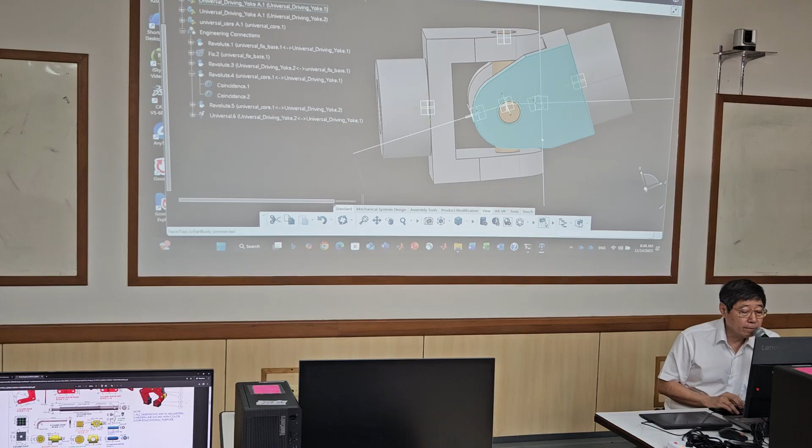Rotation, it's a pivot point right, normally let's say we have this one and this one at the same angle. This one and this one have to be the same angle, let's say this omega, this also omega, same, because universal joint does not do any speed reduction, they just allow for different angles.

We're going to use the universal joint. Normally to manufacture universal joint, if you want to buy this one they have some spec, sometimes they specify the limit of the angle. For example, let's say 30 degrees. It means they build this one provided that the angle between two shafts is not more than 30 degrees, because if they don't do this there could be a crash. So they have to limit these, so when you buy this one you normally have to check the limit angle as well.

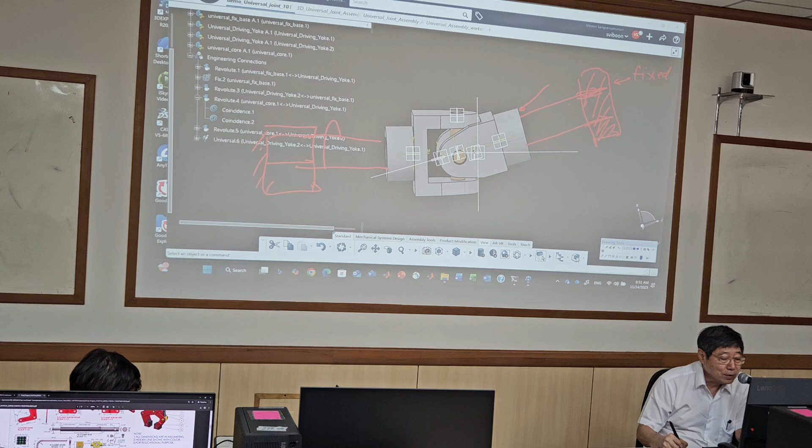You can just draw two lines, this one as a part, and make it as a fix. Or if you don't want to do this, maybe you have to draw a shaft here that fits to this yoke, and have rotation here with this one fixed. You can do this too, but it's more work and takes more time, so we just do it this simpler way.

Just draw this one and this one as a fix. So this one is fixed, this one, look at this, we have universal fixed base.

I open this one, look at this, it's just a line, see, just a line. And this is a rotation point, this is actually a rotation point. The length of this line can be anything, no problem.

And this corner is a rotation point, right, rotation point, you have to draw this one, in that case okay. So if I draw another one, I should use the driving yoke, universal.

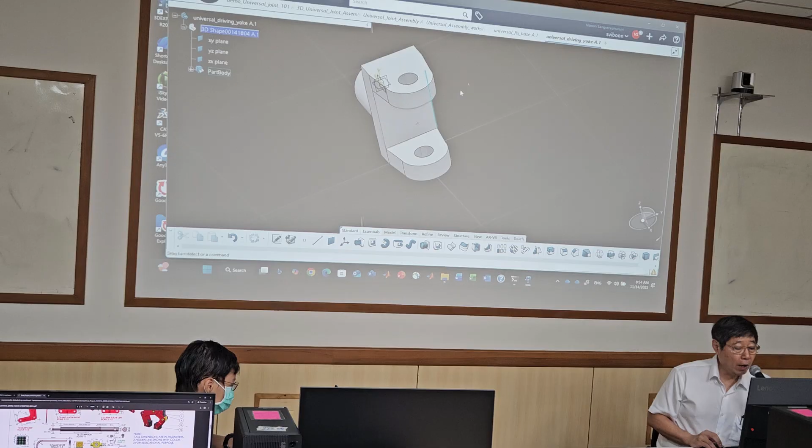Look at this one, got this one. You see, I draw this one, I also add a point, look at this, add point here. This one has to be that corner, right?

This one had to be that corner, right, that corner, same, right. So this is the center line here. So this is a point, you have to add a point there as well.

You have to add a point to make things easier. You see this one, you see that point there. Look at this one, so we have this one as a point, and the link as well, this link will intersect that.

Call it universal core, this one just called the internal. This one should be the intersection point, right, the intersection point between this one, this line, as center, right, this one. So this one has no offset.

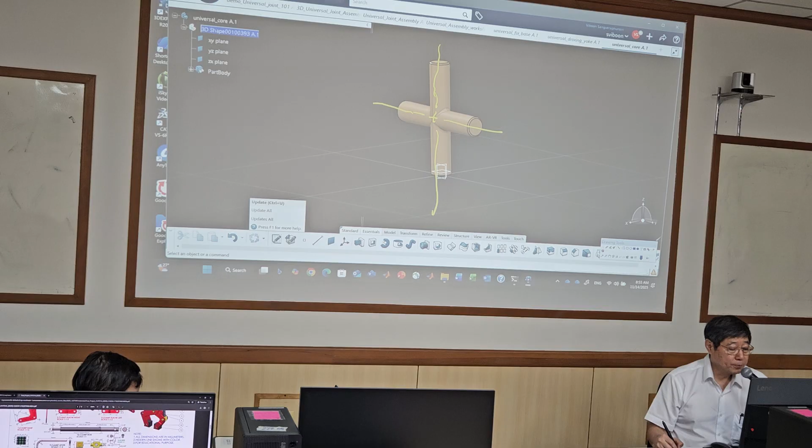The one in the example has some offset, right, in that case you have some offset, let's see this one, right, this one has some offset, but this one has no offset. The one without offset should be better in terms of allowing a higher angle, 30 degrees for example.

So you have this one, you assemble it, right, you see you have to fix this, and this one I will rotate. I actually made a mistake setting it up but overall no problem. This one will rotate according to this one, and this one will rotate according to this one.

And the center point, you see, these two cores come from the same part, right? They intersect at the center point. Use assembly, that's all.

Constraint. Let's see, look at this one. You have to have fix. I fix this one, right? This one. Okay, so this is our frame, actually.

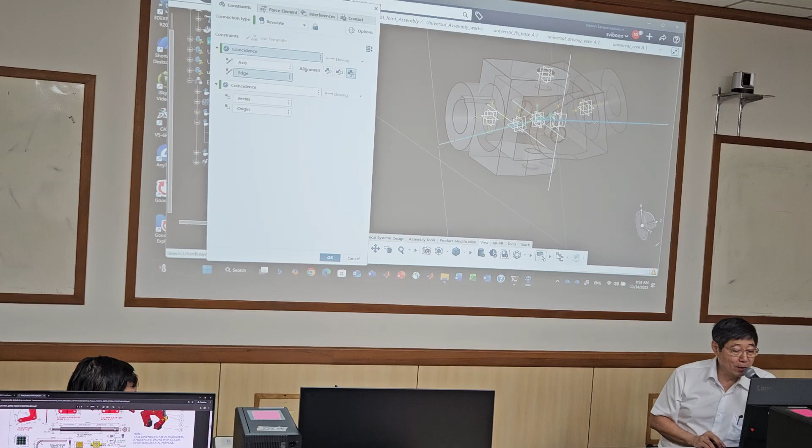Right, so that revolute - this one, this angle, the hole here coincident with this edge, and we can use point instead. The point that I just showed you, with the corner, will be the same.

Okay, that one revolute, right? The other one is this one. This one is between this link and this. It depends on this one.

I mean, this one - look at this one, this yoke one, right? You see, this one will be between core and yoke, this and core.

Okay, can be rotated. I want this one to be rotated, right? This one can be rotated according to this core. So I can set this one. Okay, I can set this one.

So this one is like, no need for constraint. The other one rotation, the same. This one between this core.

Look at this one - between this core, this one, sorry. This core, between this one, because you rotate this way, and yoke will be this one. See, similar to the previous one - when we rotate this one according to this one, it rotates according to this one, okay?

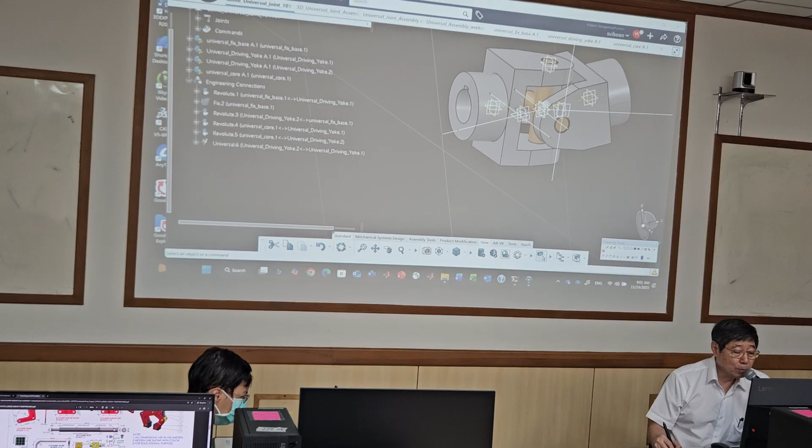Look at this one. You see, you have this one attached to this one, this attached to this, this attached to this, and this one attached to this one, and this side attached to this one, right? Okay, rotate this one. See?

So next you have universal joint. Look at this one, you have universal joint. Look at this, you have many types. I'm choosing - you see, there are many types. Let's say if you look at this one, you look at universal joint here.

If you add universal joint, there are - you see this one or this. We normally choose this one. So this one we have point, line, and angle. Point, line - this is angle. This is a point, rotation point.

So in this case, this point means the point at the corner, right? And this one is one shaft and one angle - angle with respect to the shaft, right? So in that case, look at this one.

Okay, you have this joint, this one. I choose this one, right? So first of all, the point of this yoke and point of this yoke had to be the same, right?

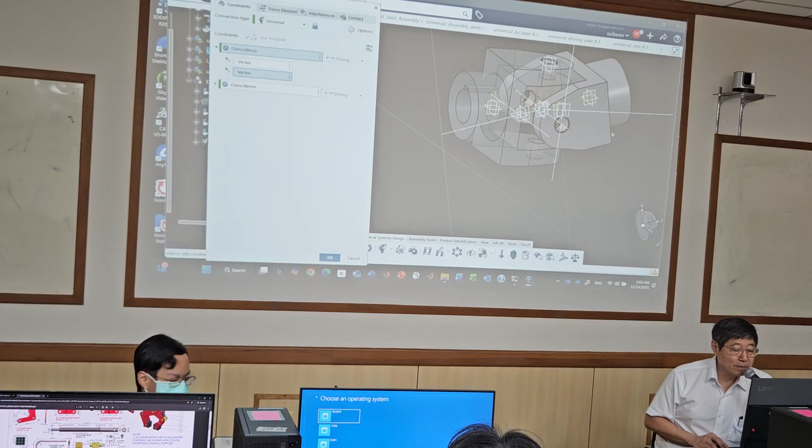This one, right? Okay. Next, that's a point of rotation. Next is the angle - rotate, right? Look at this one.

You can assign this one. You see, you have this plane of this, right? Rotate with respect to this one. You see, rotate with respect to this one. Actually, if you look at this one, this line and plane have to be in the same direction. Look at this one, see, this one.

This is a shaft of this one. This is the plane of this one. See, this plane is for this one. This axis is for the other side - for the other is this one, of this one. See, of this.

Right? So set the universal joint. See that? You see, the alignment is not in line, right? The angle - this one, that's one way. That's one way to be. I think this is probably the suitable one.

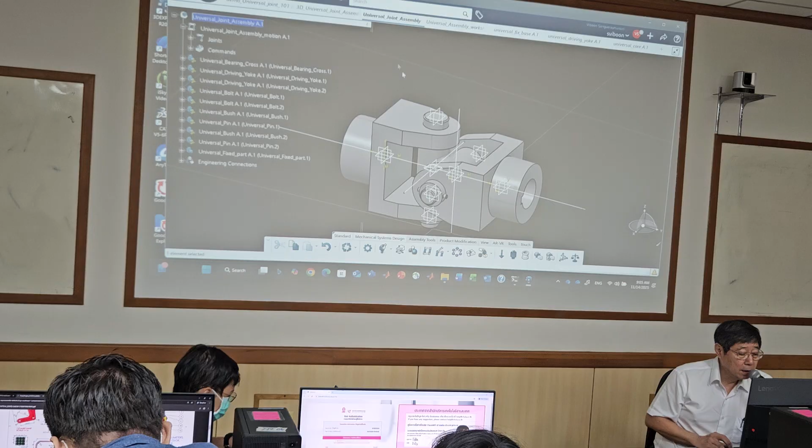If you have this one, look at it. If you have this one, we do have offset, right? You have offset between this one, between this one, and between this one. There's some offset here, offset distance, right?

So you need to find the middle of this one, this is a section point, you need to find this one. In that case, the point has to be not in this line, but in this intersection. The point here. See, it's not on this line. Previously it's on this, right?

But now it's on this because we rotate with respect to this one, with respect to this one. Okay? So look at this one. Say if I draw this one. Let's see, look at it.

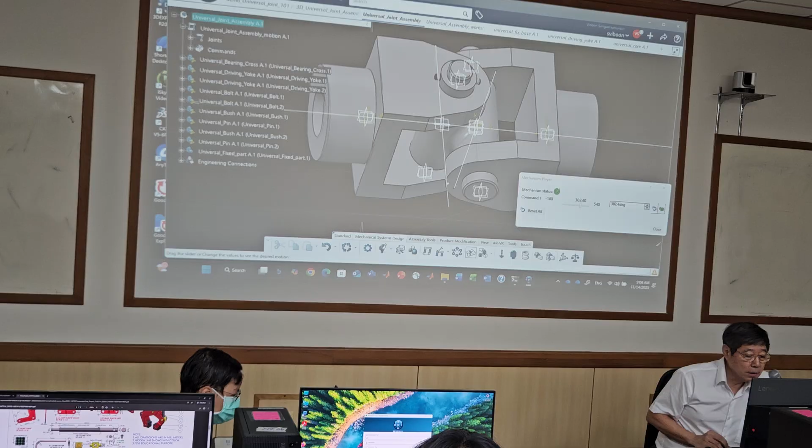You see, because there is no problem in this case, these two axes are aligned. So you don't have this one, right? This is no problem, right? But if I check this one, sorry, this one...

Okay, now we have angle and we have offset, right? Look at this one, you see you have this. Okay, look at this one. Center point, center of rotation in this one, right? This one, this point, right? Look at this one. So you see some of these...

So in that case, you see, you have to be aware. You see this one, okay? So that's the thing that I would like to mention to you. So if you have offset, it's good if the angle of these two is very, very small. Otherwise you have a problem with this one.

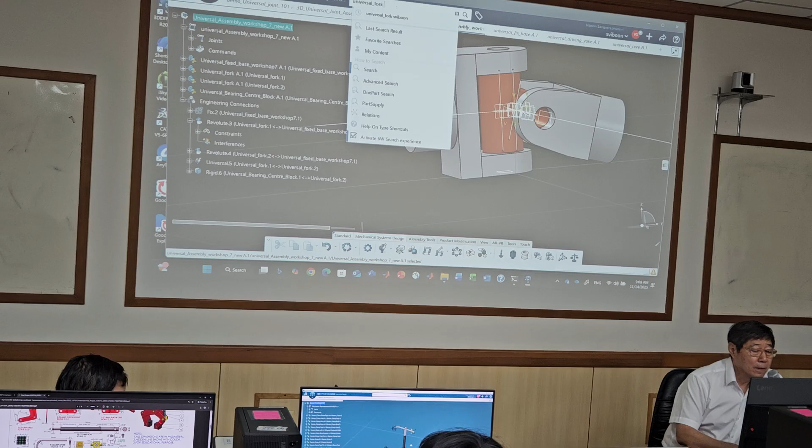Universal fork. Look at this one. Now, this point has to be, the point has to be not here, not this one, you see?

Actually this is an axis of rotation. You have to be careful where to locate this one, right? And here I can do it. The point has to be here, not on this line, right? It has to be this line, right? This line actually is the middle between.

It's the middle between this one and the other side, this one. It's the middle between this one. Okay, so the point has to be somewhere here instead. And when you connect it, this one and this one have to connect at that point, right? That point is a corner of this link anyway.

Okay, so look at this one. I change a little bit to do this one. You see, I have this one fixed, right? This one fixed. This one fixed. I have this one revolve between this and this.

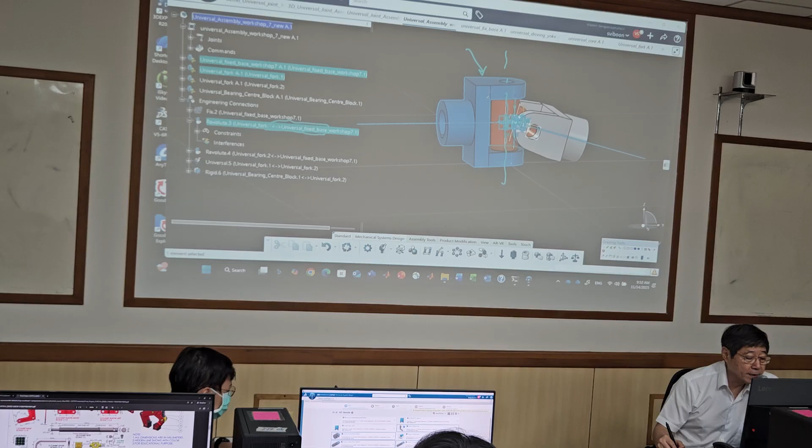Okay. This one revolves between this one, fixed base, and this one revolves between this one and this one. Okay, look at this one, you see. Okay, so you have, I make it an angle in this case, right? See, you have this one of this link, fixed links, and this one of this sketch, fixed joint anyway.

Okay, this one is the axis of the hole, this one, and this one is for the fixed link, right? We do have offset. Okay, we have a face here at the corner, at the corner. Let's see. I can put it, this is a point, it's a rotation point, right? This one and this one is set here. Yeah, you can calculate the angle of rotation.

This one as control, you see. So this one, you see the angle. This one and this one. This plane, right, of the fixed plane, of the fixed part, right? You have this one of this part and this one of the fixed frame, right?

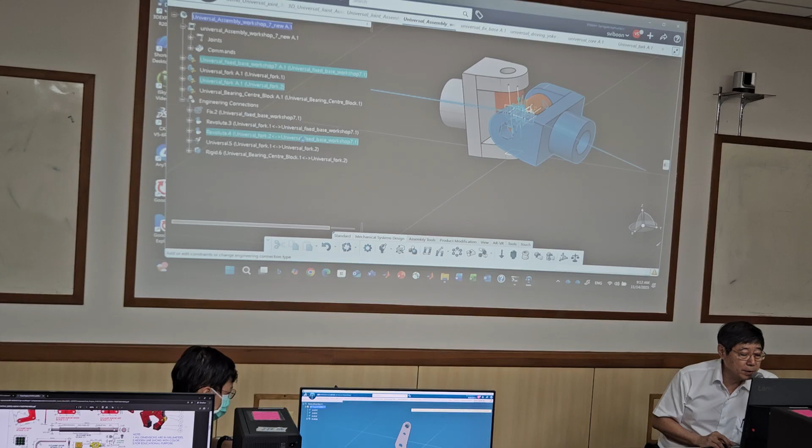So that one, that's a rotation, right? This one is a rotation. This rotation has control, control, right? Okay, the other one is this one, the other one, this and this side, right? Similar to the previous one, you see you have coincident here and the edge. This one is fixed, the line of the fixed link.

Similar offset. Face this one at the center point. Plane at the center point at the rotation point. Similar, this one is 64, the other is 64, right? And angle the same, this angle for this plane, right? And the angle of this one of fixed plane, of fixed part, right? So we have this one.

Okay, so that's the rotation. I also make rigid, I try to make rigid. This one, this one, and this one. Let these two connect together.

Okay, let it be rigid connected together, so you can actually do this instead of this one. You can do this, right? You can find out, you can do this one. This one and this one are rigid, right? So I can do this one instead of this one. I can make this part, right?

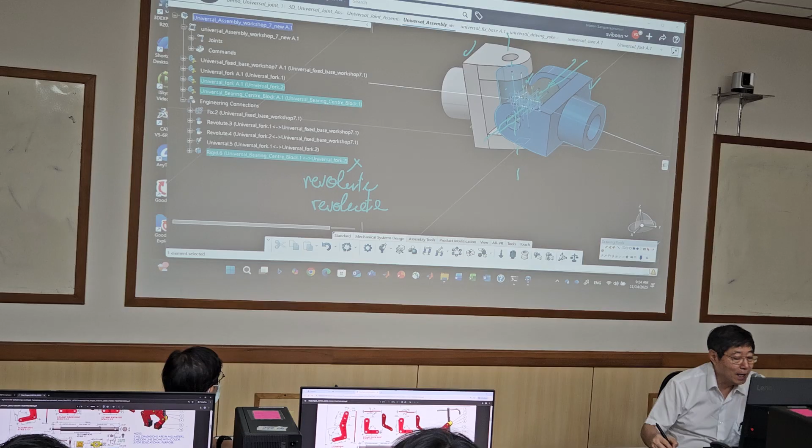Okay, between this part and this shaft, this one. Rotate this one. Then put these two instead, use these two instead. Okay, that's also possible, right?

And the universal joint are the same for this one. Look at this universal joint, look at this one. You see, one link, and the other one is on an angled plane. Look at this one. So we have this point, right? Point.

Universal joint is to assign a joint between this part and this part, right? Universal joint, this one, right? So we have this point to be the common point of rotation, right? This one, and this one, right? And this one, the angle of rotation.

Look at this one, I use this edge, right? And the plane, this one, the plane has to be in line with this one, right? This plane of this one, this edge of this one, this one. Look at this plane and edge, they are the same. You see? Look at this one. You have this one, right?

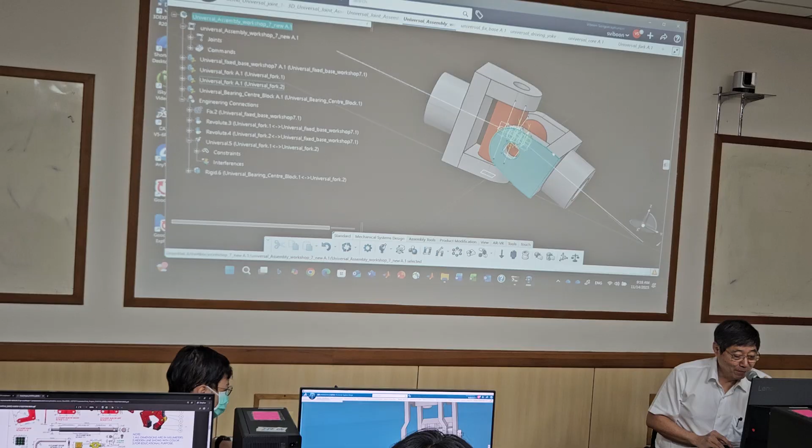If I don't want to repeat it here, if I want to repeat it here, okay, I want to change this one to be revolved. Change this one to be revolved. If I change this, it becomes revolve between this shaft and this shaft center here, and between this shaft and this shaft center here.

Okay, and you want, and you also try the same. Okay, you have this one. You try it, you can try. You don't rigid this one, just this one. You say, as before, similar to the intersection, no offset, right? Case. Okay, if you try this one, you see another problem.

Okay, if you have this corner, you see, I mean this one is at some angle with this one, right? See, instead of rigid, I put this one and this shaft and this shaft. I mean, and this fork, and this one, this shaft and this fork. We have another problem, we see another problem. Or if not, the problem is it can't rotate, you see it cannot move, anyway, again.

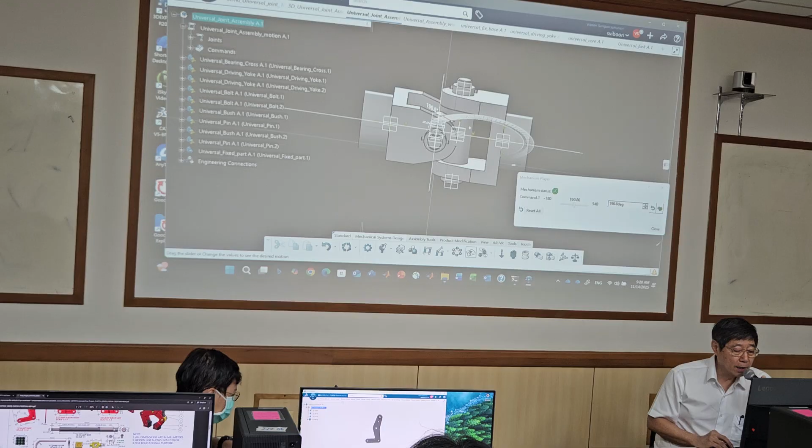When they produce production space here, allow some misalignment, some crash anyway. Okay, so that's the point.

You see this universal joint - let's say you have a very long shaft and you want to connect it together. You see universal joint, especially in automotive, or anywhere you have a very long driving shaft, you can have this one.

And this one, similar to this one, you see. This one you have center point of intersection here. You have center hole here. Center hole, this one here. And cut this one, so this is a rotation.

So this is a rotation. So you need this part to have a point there as well. This part has a point there as well. And you connect those two parts together with this joint, right? Okay, so you have this one.

You see this one, you have some angle, right? And I need the angle. You look at this one. See, you have some angle, this one. Right? This angle, right? It's not aligned, right? So at least you have intersection.

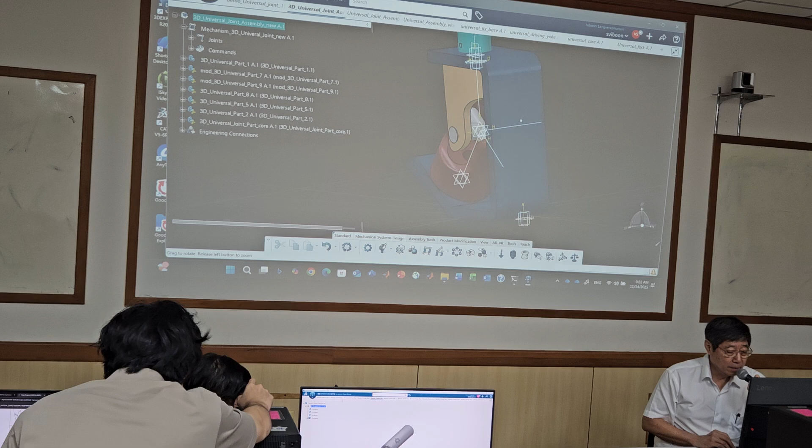Okay, that about universal joint. So in this case, this is a fixed part. And you have fixed part. You have fixed part here, this fixed part. And this fixed part is gonna have a hole as well.

See, have to have hole, so that it will be aligned with this hole and this aligned with this hole, right? Okay, so this one rotates with this one, with that hole. And this one rotates with this hole, right? This big part, the corner there as well - no, about the same. Okay, I didn't give you any - I'm not so sure I give you any dimension for this one.

Okay, that's what review the universal joint in case you don't know. Okay.

Okay, one thing I would like to mention a little bit about - sometimes some of you may know, some of you don't.

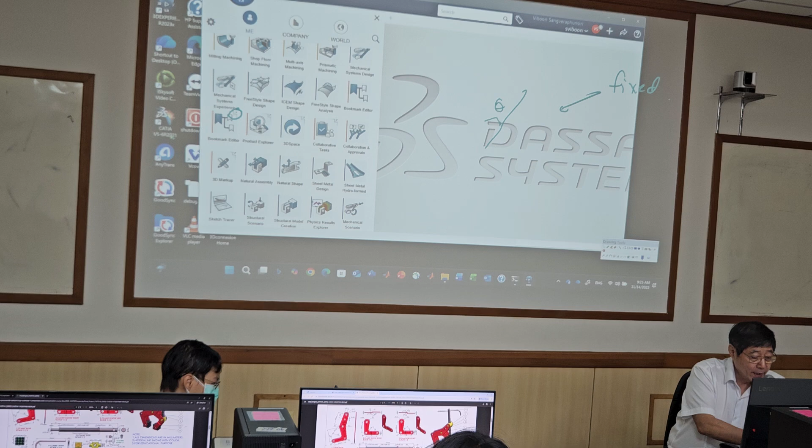Arrow, this one - there are two, right? This one and this one. Okay, this one is better. Let's see, with arrow is better. It's something like that - they will call browser for you. This one they will call browser for you, right? This one no, they just go inside this one.

Okay, but I recommend you this one. See, look at this one, bookmark editor with this arrow. See, it's similar to when you go to browser. Okay, and you just key in, right? See, they call browser for you, right? And you have that one for you. You can go there, right?

Okay, or if you are using this one, it's not go outside. Let's say you have this one, right? It just tries to be inside this. You see, it tries to be inside this one, and it's a little bit difficult if you have a lot. You have to filter.

You have to - you can go there, dashboard, right? If you remember all, this is all the directory I have, right? If you don't, sometimes it's too much, too a lot. It's not convenient anymore. Okay, so get it out this one. See, they are still in - that's all, I mean, to the experience.

But this one they call outside bookmark editor outside. I recommend if you have a small number of files you can use this one. But if you have larger files, I think I recommend this one. The automatic call browser for you.

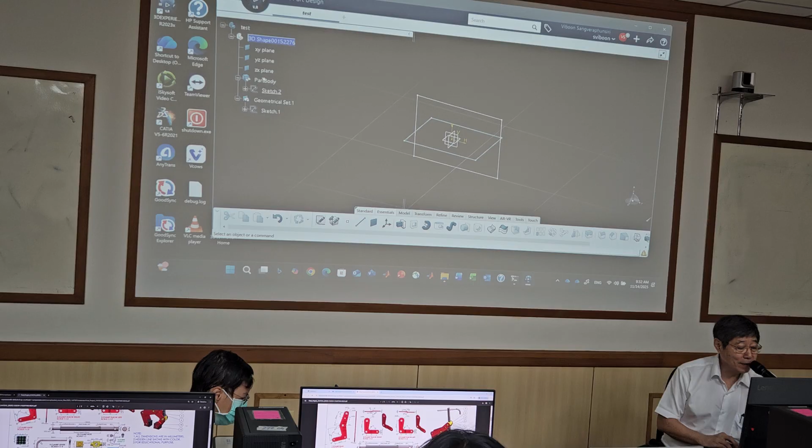If you're here, let's say doing solid, let's go back to solid. And you want to do this here, and you do this, and profile here, this one. Now sketch is relocated inside pad, right? It's not reusable, cannot be reused.

But if you want to use this one, let's say I want to use this one, you can do this. Select this one, okay, this is pad. But the sketch is still there, you can use it anyway. If you have another line here, you can combine anyway.

Let's see, we have a line here. Now this sketch is here, this sketch in here. You can make it show. I want to combine this one and this one. Now we are in part, we can do this, profile this one, I can select this one, and I can use direction here.

This direction here, you see it's still there, this sketch is still there, you can reuse it anyway. Sometimes it's very helpful if your shape is very compact with many lines in there. This one is helpful, it's very good in terms of editing or modifying.

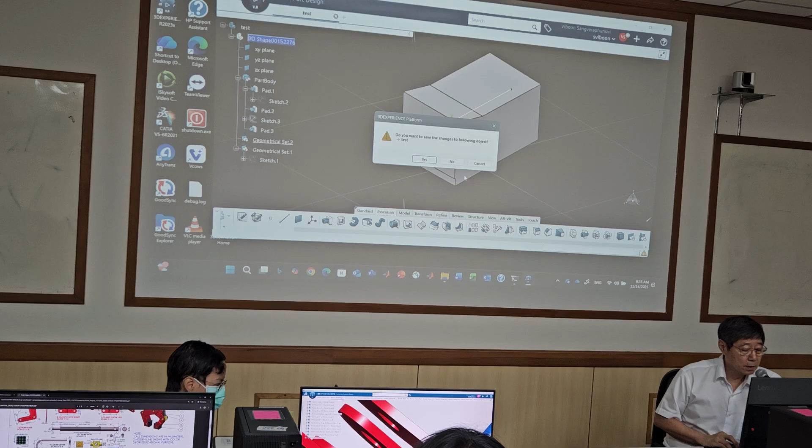For the universal joint, is it okay if I manually do each joint instead of using the universal joint? No, the same result? The schedule is fine but the part is not fixed. No, I fix it to the point, like the shaft line, so it's still revolving in the same direction. So that should be fine. I don't know, I have to see if it's realistic or not - it's like a real thing, working that way.

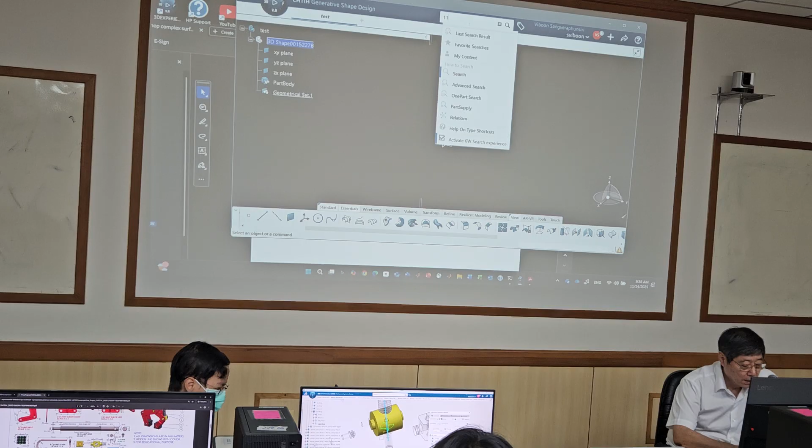Okay, let me see this one. Okay, look at this one. This one used to be an exam. It's a very simple one, but do not realize it may be difficult. Look at this one, you see, we started.

Let me hold this one. Okay, let me hold this one. Okay, we show this one first. Okay, show this one. Okay, I can show this one. You see, actually, first of all, I create this one.

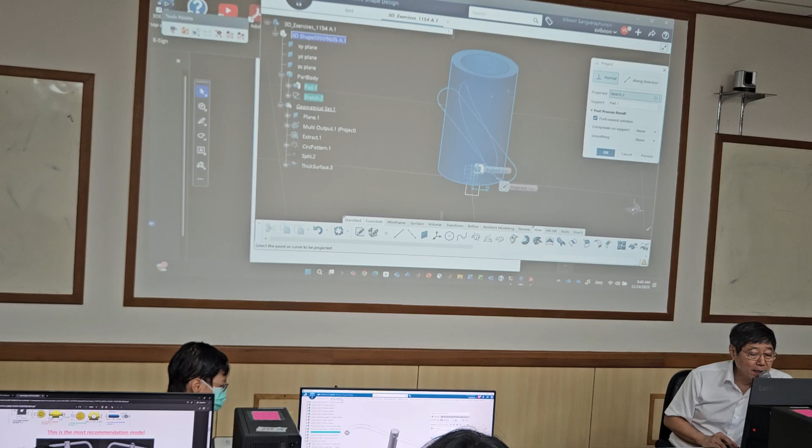I create this cylinder. I can extract this surface. Actually, this is a surface. And I can do projection. This one, let's see, you have this one. You just draw this one, and you project this one to this. Right, projection in this case, I can do normal, projection normal to this surface.

Right, you extract surface and you project this one normal to this surface first. Once you have this one, you can generate pattern, this one, sorry. You can generate pattern, circular pattern, this one. After that, you just split the surface. Split the surface. Okay, so you just split surface and hide this one. See? Okay, I split this one. You see? And after that, just do thickness.

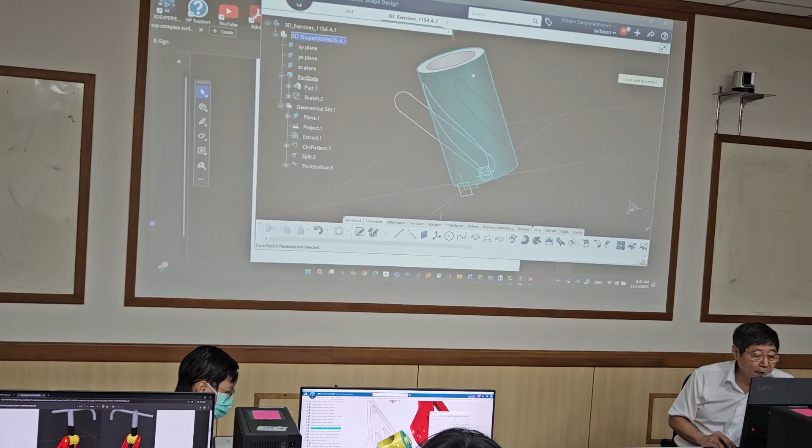Okay, so first of all, start with this one. Besides, so you don't need a hole in this case. Just cylinder, right? And you extract surface, you extract surface, and you draw this one. You draw this pattern, right? This pattern. Draw this one and project this one onto this circle, so this curve on this surface anyway. Okay, and after that you can circular pattern. And you can trim surface, split surface anyway. Split surface. Once you have split surface, you can add thickness. Okay, so that's the point for this one.

Good. You have, we also need to do fillet, 0.2 radius as well. Okay, so let's see this one. This one. So this one. This one. Actually they need fillet 0.2.

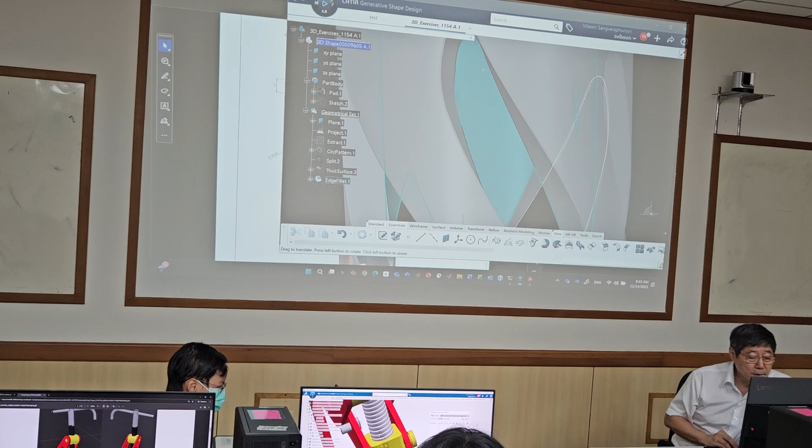Let's put it here. Fillet. For this case, this angle, this one, all of them. Okay. You need fillet as well, 0.2. Okay, that's the point. Inside as well. Not just outside, inside too.

Well, you can do whatever you want. This as well. You can do this one as well. Outside as well. This one as well, this one as well. Also inside. This one as well. Okay, this one also used to be an exam.

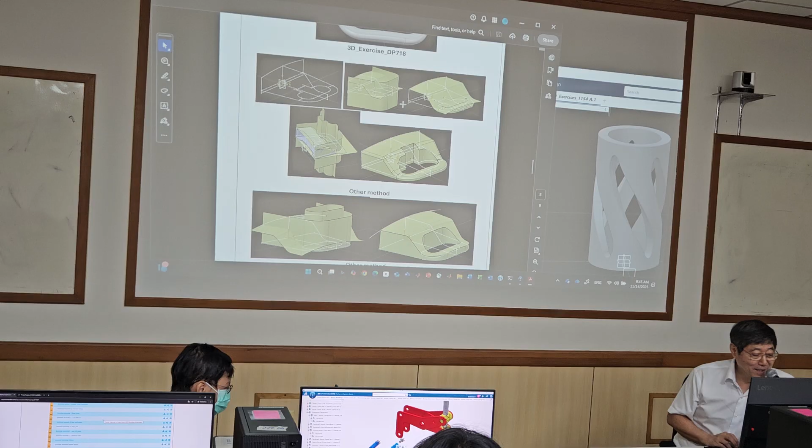But I give you all the process like this one, and you follow the process. Okay, this may come back again. Try it anyway, you can try. You start with surface. First of all, you start with this profile first. Okay, because we think this surface, we need profile, we need line, right? We need to create all these first. Okay, and after that you just extrude, and sweep or whatever.

Try. If I give you all this information, is it possible for you to do this problem? Okay, if you can do this, mean that this midterm, this final, you are ready, no problem. I give you everything like this. And one of the exam will be equivalent to this one or this one. Okay, so you first try this one. Okay, one very difficult one will be in the exam. This is supposed to be same level.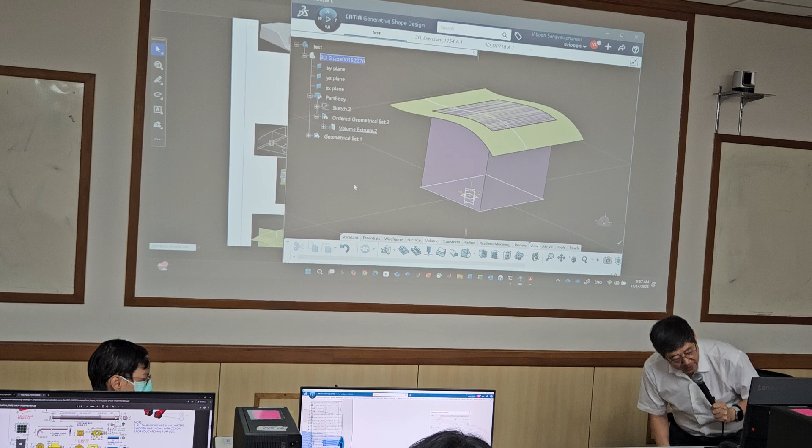So don't try to use it. You can use it when it's the last command, if you don't want to do any more edits. You can edit within this command only. And the default color set is the purple color. It's not that one.

If I go back to part design, I want to create this one, this skirt. I create this one, I want to do pocket here, with this one. See, they don't allow it. You see, when you create this one, you say I want to do pocket, they don't show any pocket here. You see pocket, but it's not activated. So you cannot manipulate this one. That's the point - it's a solid just for some specific purpose only.

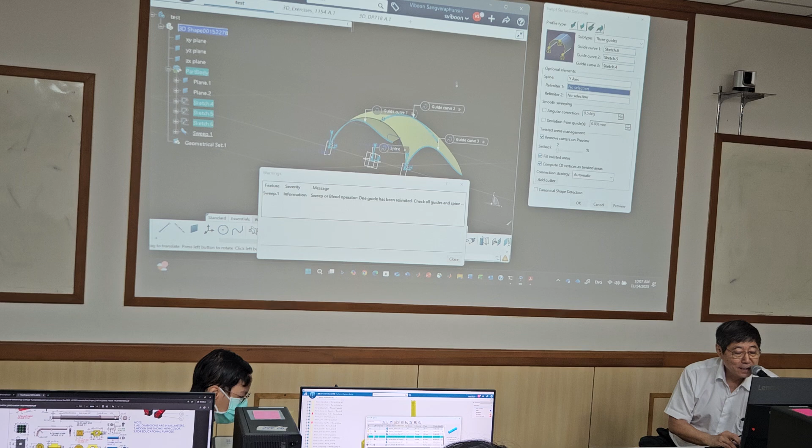See this one? In this surface, all this is a curve - a circle, different circles with different radii. You have to move this one. If this one is a straight line, that is not, but you see a circle. If it sweeps normal to this y direction, you get this curve.

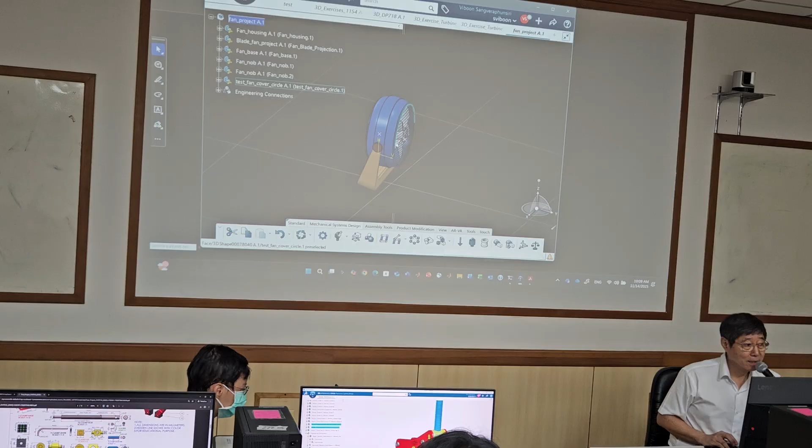About this one. I need - I do, yeah. This one, I do, okay. I need fan, this one. This one.

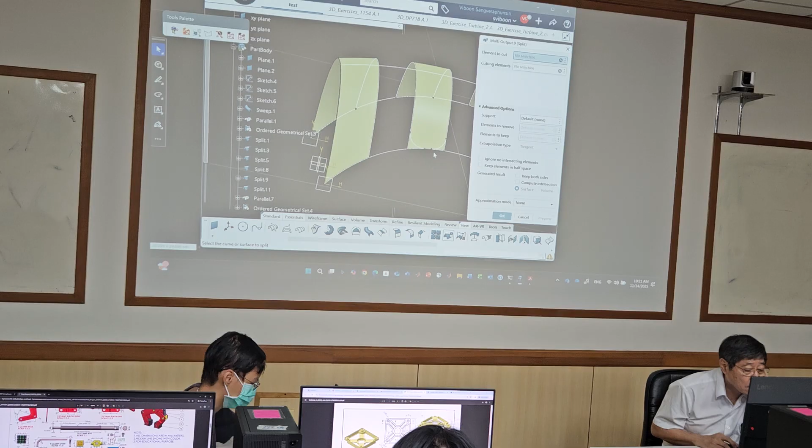Wait, have you used that tilted?

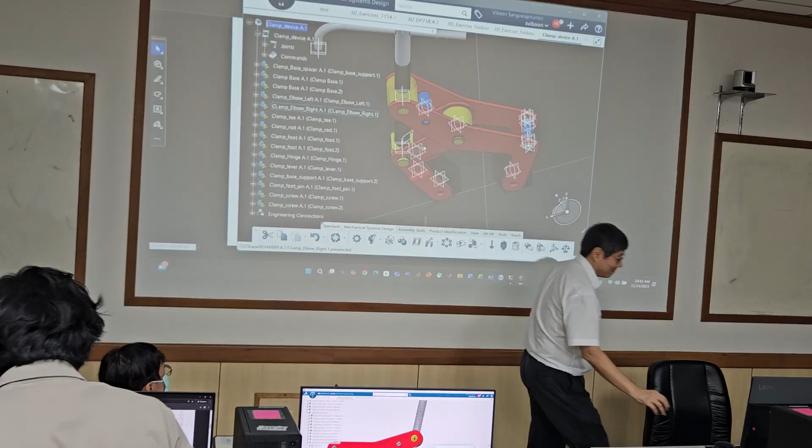The cam at the bottom leg, this is the one that can rotate, it should be. I check also this one as well - this angle here, I check it. I check also this one as well, yeah, have to be symmetric in the middle.

It's better to add, if it is possible, better to add a screw here. Some sharp - let's say not the screw - this is sharp, this is possible, but print... don't follow me.

I'm not finished. I put something in here. See?

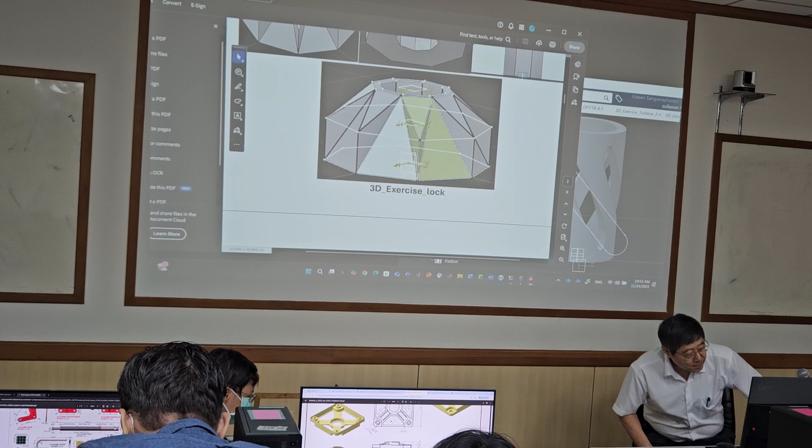For this one, it's better to use - if you want to create this one with solid, sometimes it's quite difficult. Anyway, you can do this by seeing you have polygon here, as well as polygon here. When you have polygon, you have point. In that case, you use a 3D line to connect all those points. When you have line, you can use fill surface. You can get one of this and rotate. Rotate is also possible, and fill, make solid.

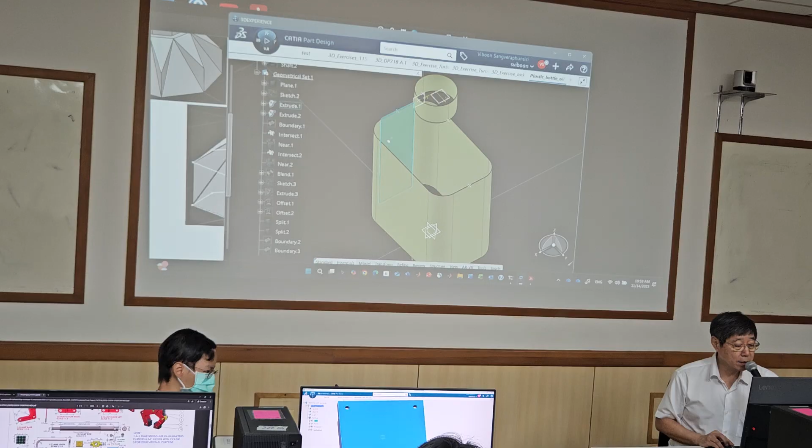This one - let's see, here you have this point there. This point can be used by intersection as well. Like we can use this plane for intersection, got 2 points, this point and this point as well. I recommend in this case I use a plane. So I have plane here, right? So you have tangent, and tangent here. I use plane - see, with this surface and this surface. My start point and closing point will be the same. Closing point will be this one, right? Closing point and closing point. This one, direction of curve, you see, and you have this one, and tangent - use tangent and tangent.

You maybe use multi-section, but also you need, if you use multi-section, you have to specify connectivity between this tangent and this tangent as well. In my case, I'm using the blend command, this one. But you have to change the closing point so that it will be the same location.

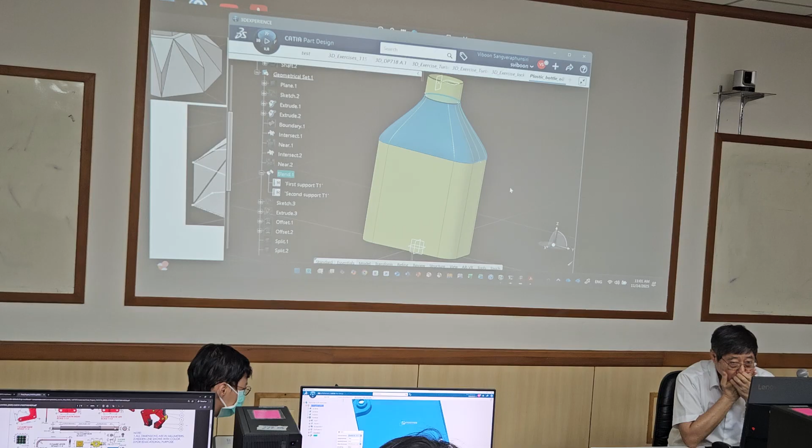If I've used blend, in this case, I don't have to do any fillet - I don't need to do fillet. See, already blend, already fillet here, of course.

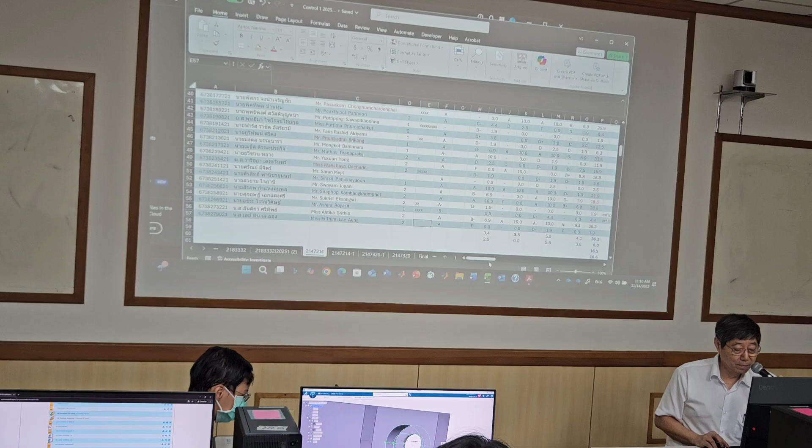Very easy one. This year the final project is much easier than last year.